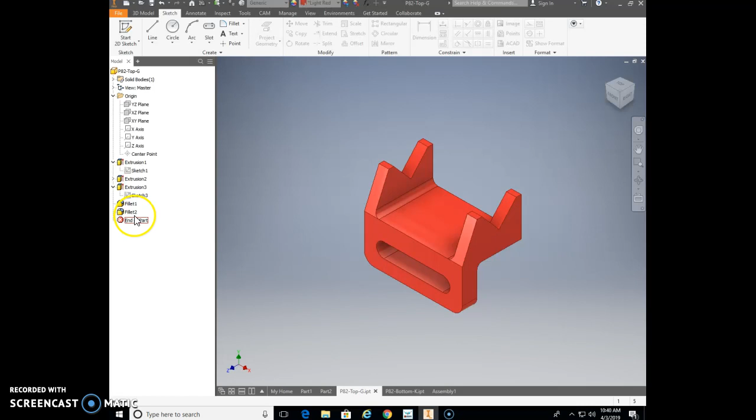First off, it's always a good habit of saving your fillets to the last. It's a lot better to add your fillets when it's a 3D solid than to add them into sketches. Fillets on a sketch will really increase the complexity of your sketches, so it's better to fillet them at the end. Fillets are something that often change, so it's easy to change them if you do them at the end. For example, those two bottom corner fillets, I did those at 1/2 of an inch on this drawing, which is great.

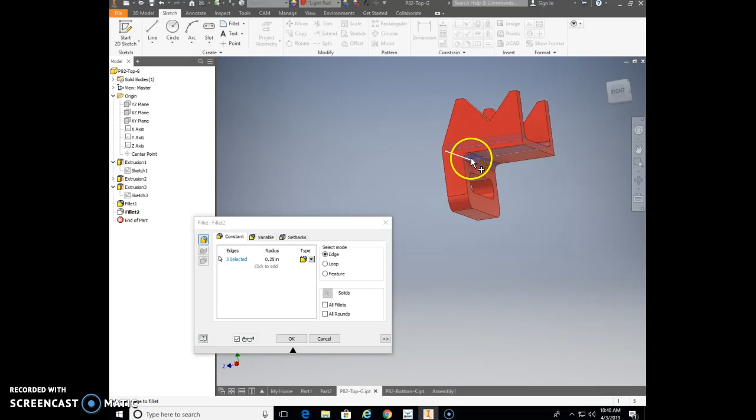These fillets, which are those two there, and one on this side, I did those at the end, and I did those at 1/4 inch. So those fillets, always good to put in at the end.

The other thing I wanted to show you on this drawing is this slot. To put this slot in, there's a cool command for slot. I'm going to go back in there to the sketch for that.

So there's my slot all fully constrained. If you notice, mine's already set up here. Up here, your rectangle command, if you hit the down arrow for it, you have some options for slots. You can do an arc slot, whatever. I just did the center to center slot, so I clicked on it, center to center slot.

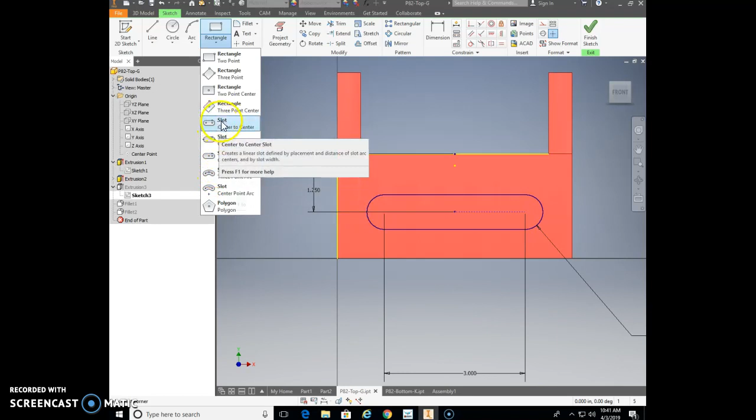Come over here, I'm just going to put one down on the open space. From there to there, put it on a nice straight line, and then you can pick your height of your slot. Then you just start dimensioning it up.

On this one, the first thing I did is I wanted it centered up here on my object, so I did a horizontal or vertical constraint on that. I picked vertical, made the vertical point even with the center of the object, so that centers it up nicely. Put in the dimension here, showing the length of the slot.

Showing that as I have 3, so I'll make that 3. Then the radius of the slot at 0.375, and then one more dimension showing where this goes up and down. So this one I put it in like that, and that turns it all blue.

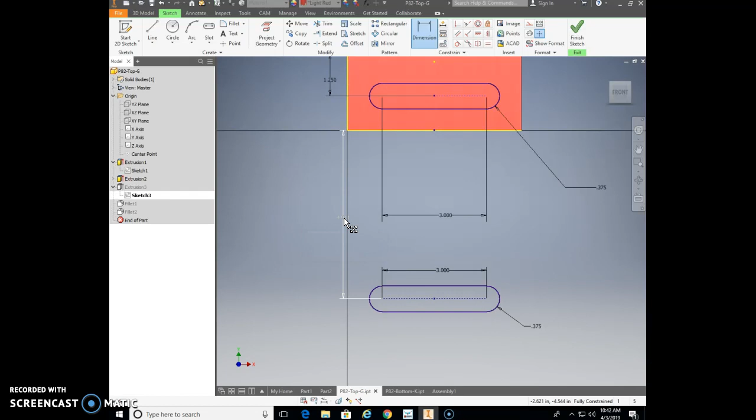So something like that. Obviously I don't need the slot down here in the wide open, but it was just kind of showing you how to do that slot. So any drawings you have slots on, slots are really not too bad to do if you know about that command.

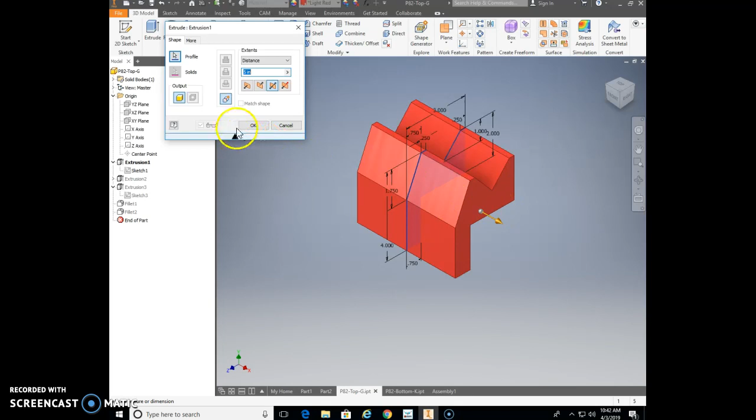Other than that, on this drawing, I started this as just one block that was this shape from the right side view, and drew it like so. Extruded it both ways. Then I made an extrusion and made this a cut on this extrusion and cut out that block off the front face there. And then I just did my slot as I just showed you and used the fillet. Really a pretty straightforward drawing.

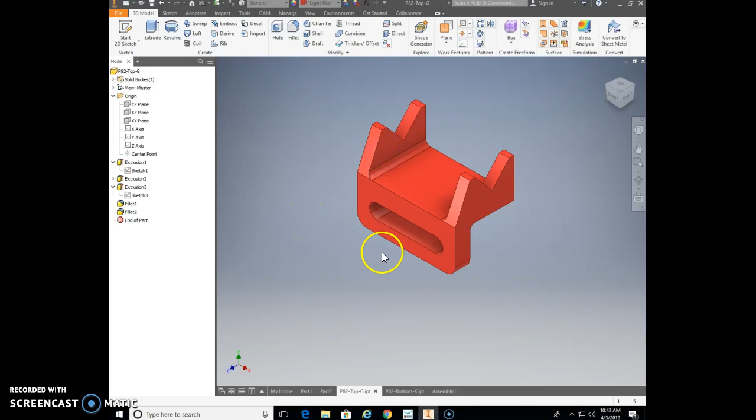Okay, so your instructions for today now is, out of the new list of drawings you're going to get today, in combination with the drawings left from yesterday, I want you to make 3 parts that will fit together. So this is my first part I drew last time. Today I drew another part. I drew this part, and I want to make it so these 2 parts fit together.

So here's my assembly. I'm going to make it so these 2 parts fit together. I want to make it so this part fits right here onto this part, like that. So it's like these 2 parts were made to go together. You're really going to have to think about your dimensions so they fit together correctly.

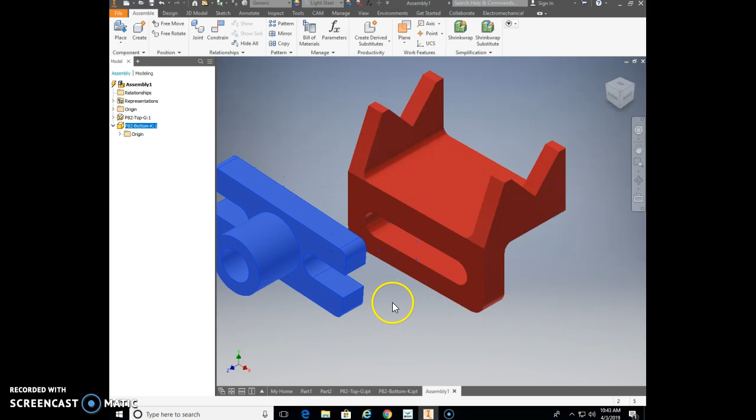So for example, I'm going to start this by constraining, just mating this part right there. Applying that, so there's that part mated there. It slides around on that surface. Then next, what I'm going to do is I'm going to mate this right up to my slot. So I may have to adjust some things, but we'll adjust if I need to.

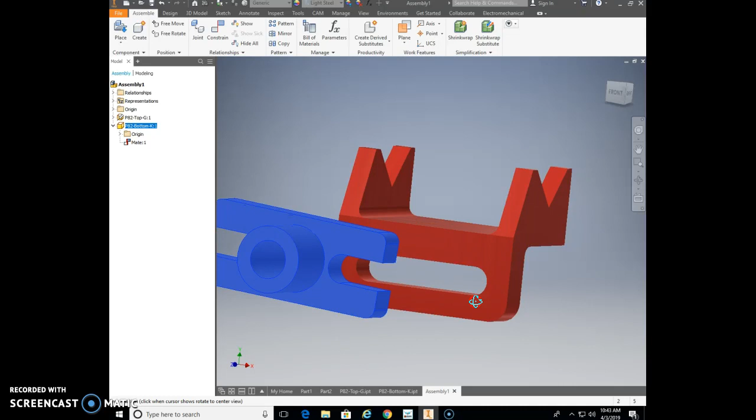So I'm going to go constrain, a little bit different type of constraint this time. I'm still going to use my mate constraint, but I'm going to hover over top of this arc, and it's going to give me the center line. So I'm going to click there, select the center line of that arc, the axis of it. Then I'm going to come over here, hover over top of that one, and constrain center line to center line. Right like that, I'm going to apply that.

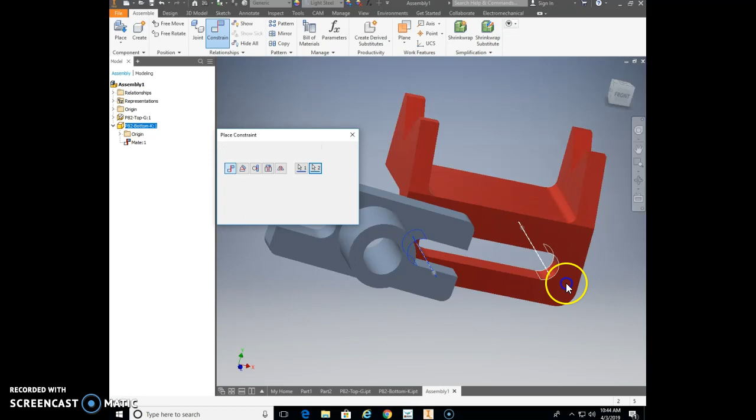So now let me hit my F6, get back in there. Now my part's fastened in there, it rotates right around those center points there, and that's exactly what I wanted. That's where a bolt would go through, just to bolt this together. But now, however, notice it doesn't fit real good here in my length on this. That length's just not right.

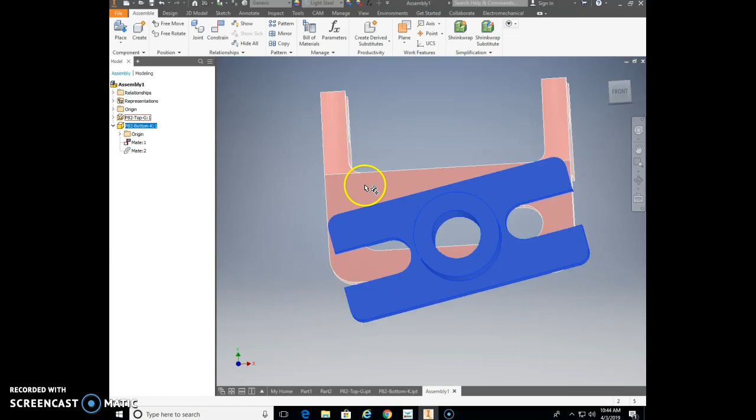So I need to modify one of these parts. I think I'm going to leave my red part all the same, that was letter G. I think I'm going to change this part instead, and this is letter K on the bottom. So instead I'm going to change this.

So I'm just going to measure. First off, you can use my measure command, and measure from the center of that circle to the center of that circle, and I get 3 inches. I need 3 inches between the center of those two circles on this part.

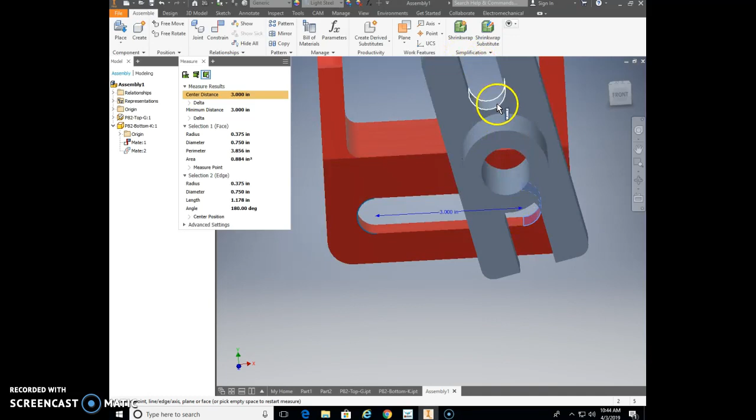So I'm going to go back to that part. I'm going to go in here. Let's figure out where this is. Where is this drawing? I think I did that one in my extrusion here. Yes, I did. So I'm going to click on my sketch.

Now, I made this a little bit differently, so that's going to be a little bit more difficult to do. The center of mine is actually going to be out here, so I'm going to really have to kind of play with this a little bit. 3 inches I know is not enough. You know what might be easier is doing it this way.

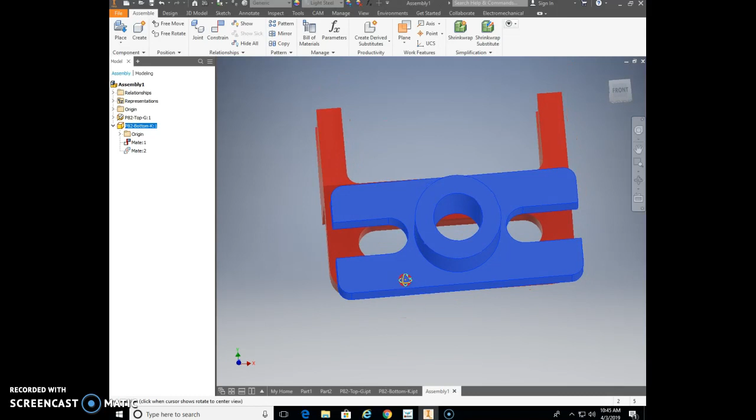I'm going to go back to my assembly. I'm going to rotate this back around to where it's approximately there in place. I'm going to measure from the center of this to the center of this. Alright, it gives me 0.791 inches. It's a little bit of an angle there, which is why it gives me kind of an odd measurement.

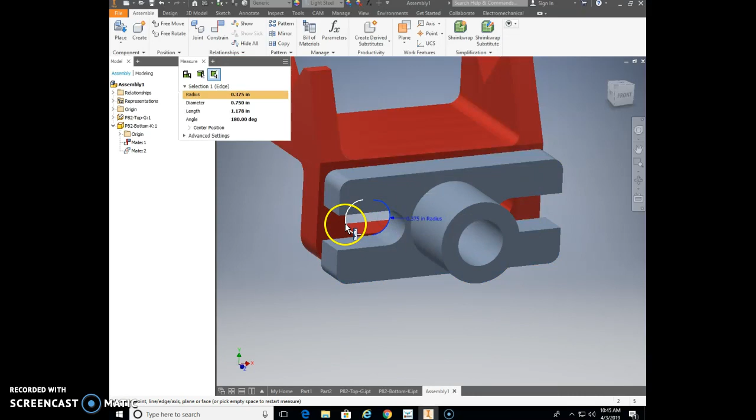And did I go from center to center? Ooh, I did not go from center to center correctly. Let me try that again. Let me measure once more. I'm going to measure from this bottom point to that one. There, it gave me a nice straight line. From center to center, it's 0.252, just over a quarter inch.

What that tells me is, on this, I need to increase this middle measurement a quarter inch. I'm going to go 2.25, do there.

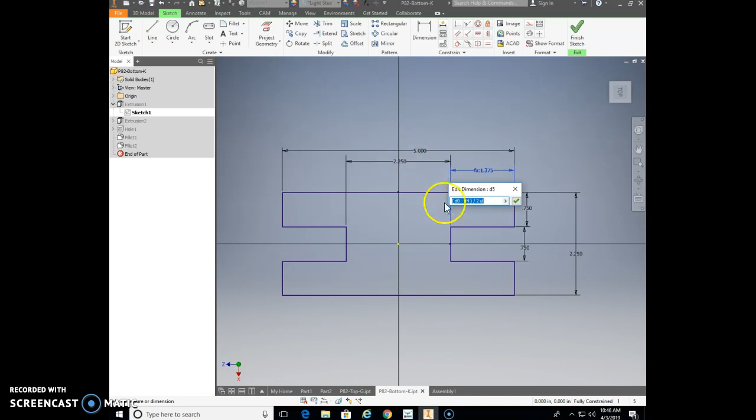Now notice here is another little side note. I made this dimension as a formula. So this dimension, we did this the other day, is the overall dimension of 5 minus the dimension of 2.25, so it's D0 minus D4 divided by 2. So that made it nice when I came in here to edit this drawing. I just edited this one, increased that to 2.25, and it automatically kept that centered up for me.

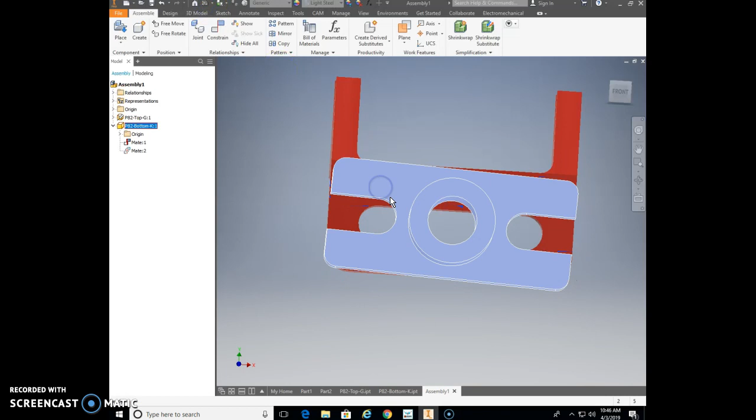Now let's see if this works in my assembly. So we finish that sketch, go back to my assembly, let's update. Look how nicely I think those things line up there. Let's see if it constrains. Constrain the center line of that to the center line of that. Apply, and look how nicely those two parts fit together. They fit together really nice. This one overlaps just a hair on this side.

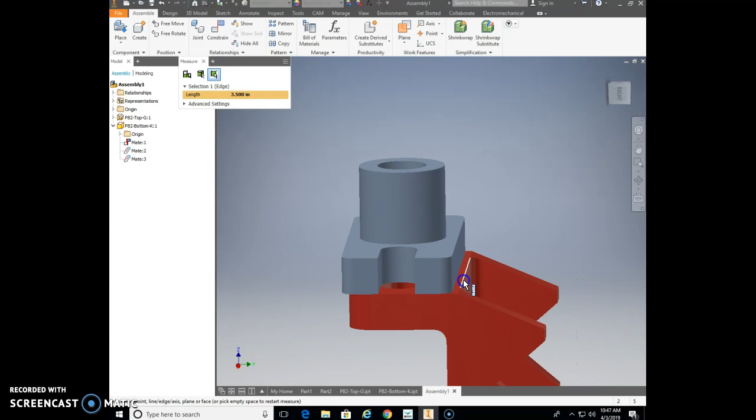You know, maybe we could do that a little bit, change that up. Where I would change that up is I'd probably change this red part, and I'd measure from, again, there to there. That measures the 1/8 of an inch, so 0.125. So on this drawing, I need to change this slot so it's 1/8 of an inch higher.

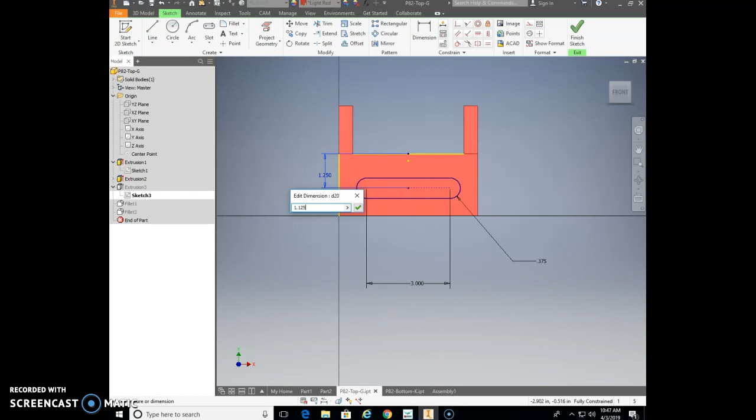So I'd go in there to that part, come down here to where I have my slot at, right there, and move my slot up 1/8 of an inch. Right now I'm at 1.25. Let's change that down to 1.125. Change that, finish my sketch, go back to my assembly, update it, and look how nicely, it's like these two parts were made to go together. And that's what I want you to do, is make it so those two parts are made to go together.

Now, you'll probably have to end up modifying your parts, the letters in the book from page 82, a little bit so they don't look exactly like the ones from the book. But yet, I think mine really look pretty close to the ones from the book here. I think my letter K looks very similar to the one in the book, and I think my letter G from the top looks very similar. And just look how nicely those things line up. So that's got two of my parts together.

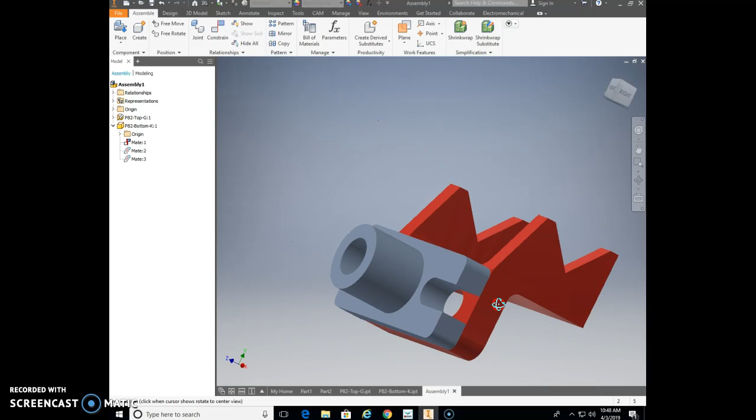I want you to add a third part to this. I do not have my third part created, but I want you to add a third part to this somewhere. I could do a lot of different things. So for example, I'm looking for another part that might work with this. I could just add letter E out here with the slot on letter E onto the end of this. Would be just fine. I could add letter H with a little arm on letter H.

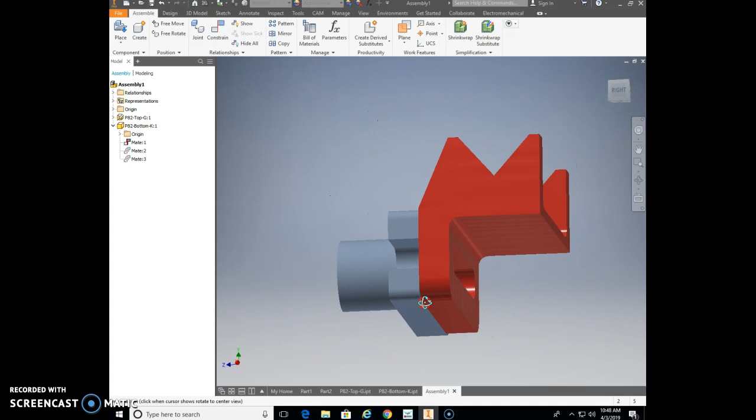I can make it line up with the slot here. I can make letter H, the circular part of it, line up with this portion here. Letter J, I can make letter J, the circular part of either end of it, line up to this part. I really am not going to be that picky. Just pick a couple parts to go together and make it work. So, good luck on this.

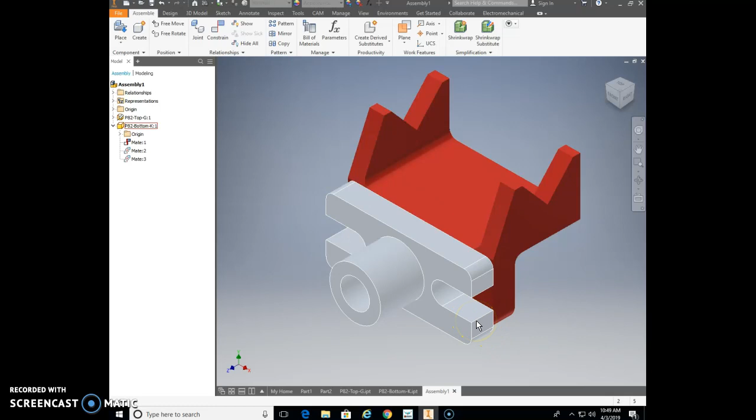Actually, I'm sorry, I almost forgot one part. The other part I want you to do is, I want you to make some pins. This part is just not going to magically stay on there. It's just not going to stay there like that. You need something that holds it together. Typically in this instance, you'd have a nut and a bolt that hold it together. I'm not going to make you create a nut and a bolt.

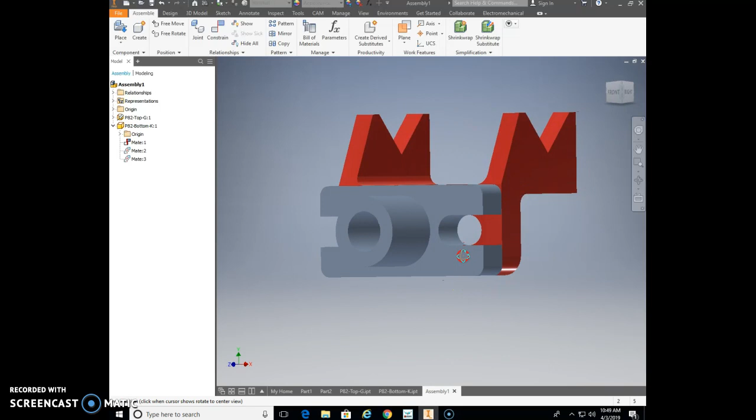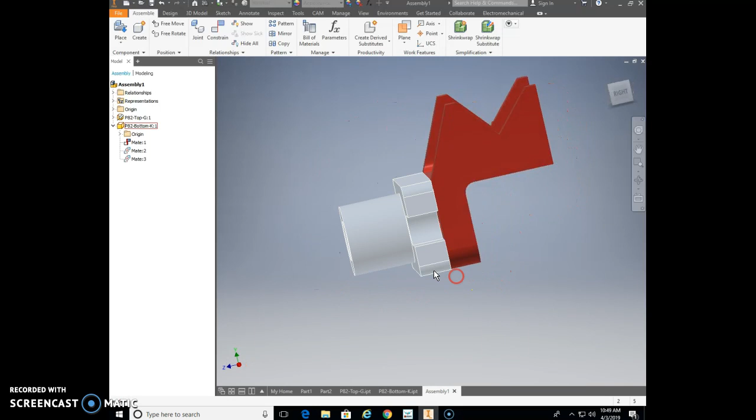Some of you are a little bit more advanced and are getting this. Great. If you want to create a nut and a bolt to go together, that's fine. But all I really want is just a pin that's going to hold these together. So for doing that, I'm going to have to do a little bit of measuring. I'm going to measure this size of my circle here. And what do I got? That's a 0.375 radius circle, so it's a diameter of 0.75. And then measure from this surface to there, it's 1.5 inches. So it looks like I need a diameter of 0.75 and 1.5 inches.

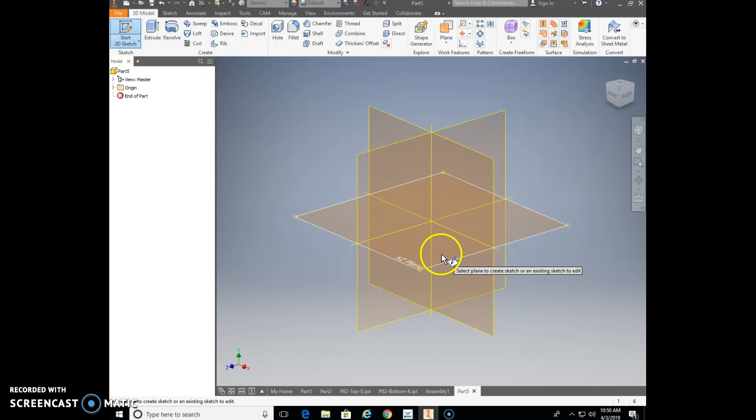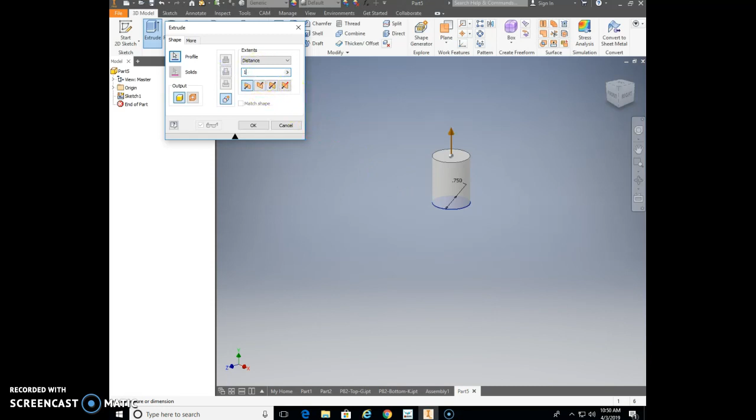I'm going to go ahead and do a new drawing, a new part. I just, again, make a pin. So I'm going to start my sketch. I'm going to start it on this top plane. I'm going to start with a circle, right there on the origin. Then I'm just going to dimension that at 0.75. So there's my circle. I'm going to finish that sketch and extrude. Again, on something like this, it's a bolt, so I probably would just go one direction. And I think I just measured that to be 1.5, so I'm going to go OK. Then I want to put some sort of a head on it.

So I'm going to start my sketch on this top surface. You could do a circular shaped head, but if we come up here and look, we have some other options. Where are my other options? I think it's underneath this, isn't it? Yeah, it is. Underneath there, we can do a polygon shaped option. If you know what a bolt is, a bolt actually has a 6-sided head, which it defaults to.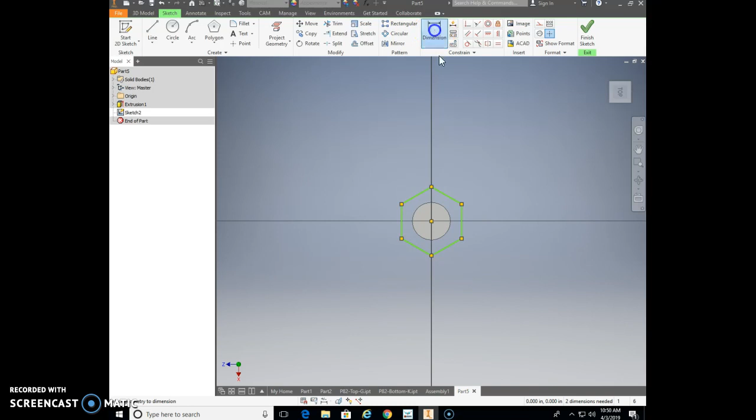And start it there, yeah, something like that. You need a dimension from flat to flat. Nice round number there is good, so let's go 1. Now the only other thing you need to constrain on this is this thing will spin around, so we need to constrain it something like this. Oops, actually, I guess I already have it constrained. Sometimes you do have to do this, and you have to make that point of it horizontally constrained with the center point, or vertically constrained with the center point, and that will do it. So there we got that fully constrained.

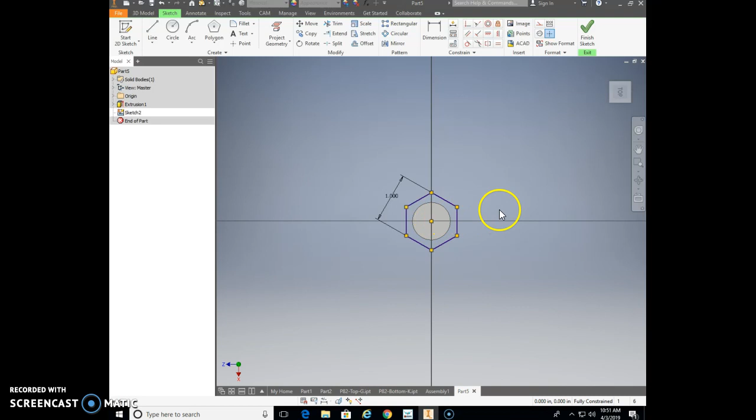I'm going to go ahead and extrude, and I'm just going to put a head on this bolt, maybe 0.5, like that. I'm not going to make threads to it again. I'm just going to make this a pin that sticks through there and stays in there. So there's that. I'm going to go ahead and save that with my other parts, and this is just going to be called bolt. I'm going to see if I can save it this way. Bolt and 0.75. I don't know if it's going to let me do the point there. Let's see. Hey, it did. So now I'm going to go back to my assembly.

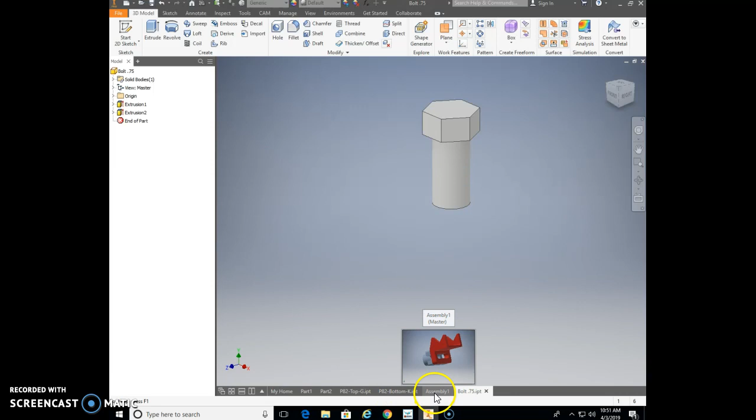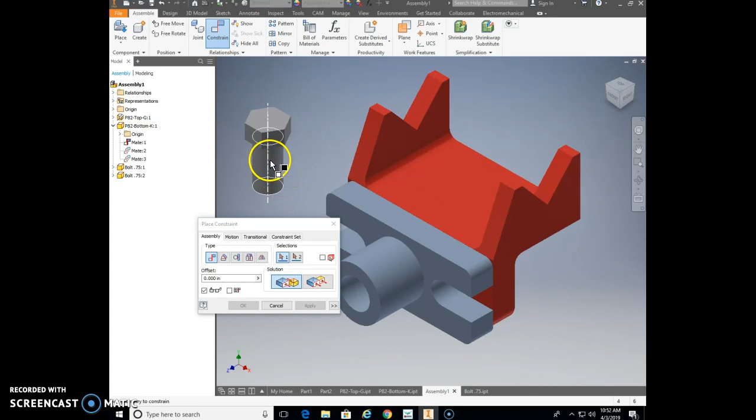I'm going to hit my place. I've got to go to where I have that saved to. I'm going to place in my bolt. I'm going to need 2 of them. Actually, I keep calling it the bolt. This is just a pin. I'm going to constrain. On this, I'm just going to use the center lines again. I'm going to use the mate option. I'm going to go center line of that bolt there, to the center line of that hole there. Apply that. I'm going to do the other one, center line there, to the center line there. Apply that.

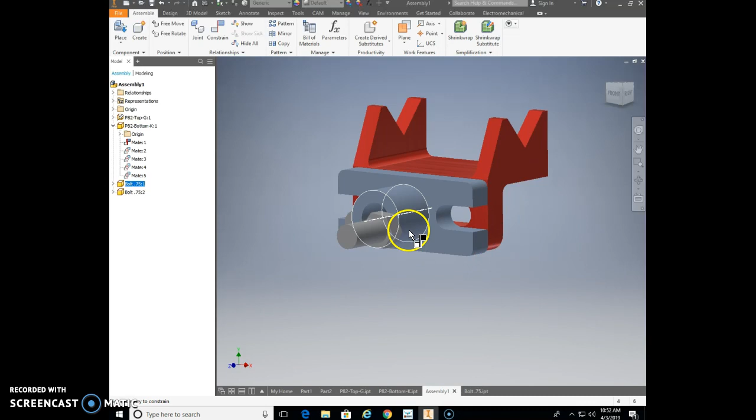Now notice, both of them are going in that direction. That's really not what I wanted. I want them going in from this other direction. So all I'm going to do here is go constrain. I'm going to do a mate. I'm going to mate that side to this surface. And apply that. Oh, it will not let me do that. I should have done the other step first. So that's okay. I'm just going to delete out that mate. Notice what I did there. I just opened this up, deleted out my mate. It's going to make me do that first.

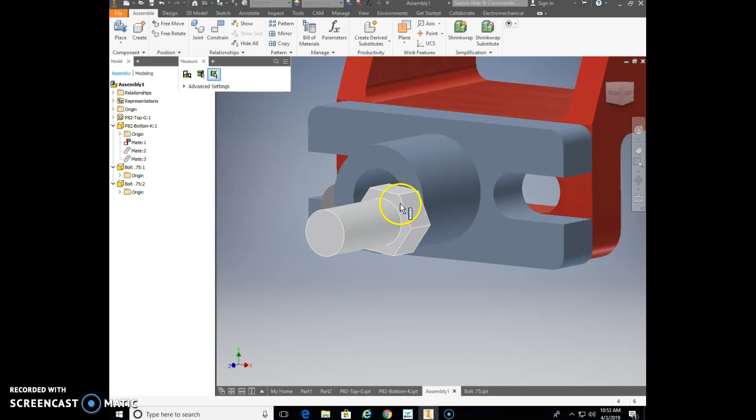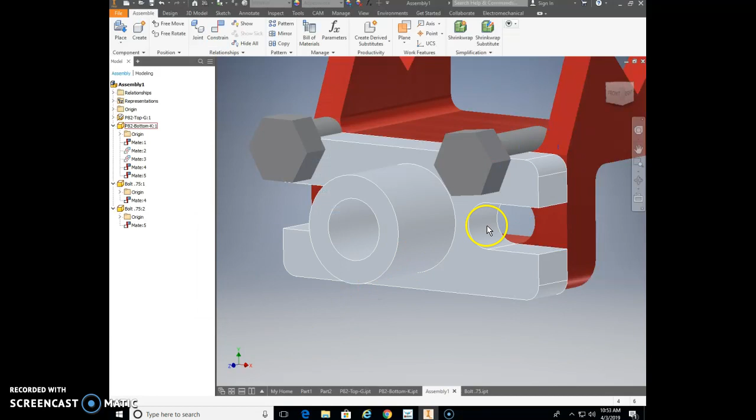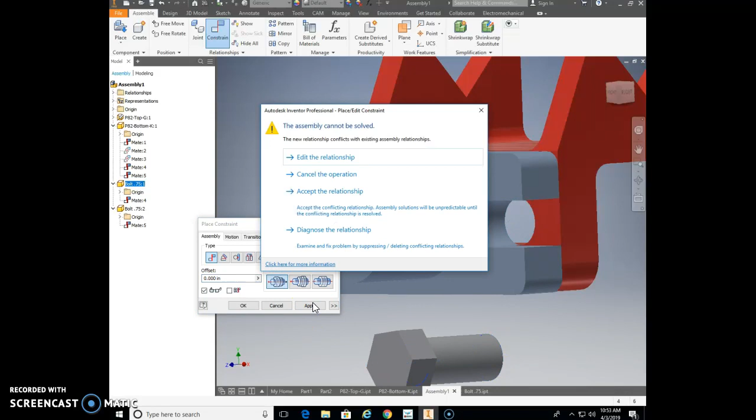So I'm going to constrain this surface to there. Apply that. Let me pull this one out of there a little bit. Constrain that surface to there. Apply that. Now I can go center line there, to the center line there. Apply that. Oh, come on. Center line that, center line that. Why is my center line that? Center line, center line. Huh. I don't know what it's doing to me. That's interesting.

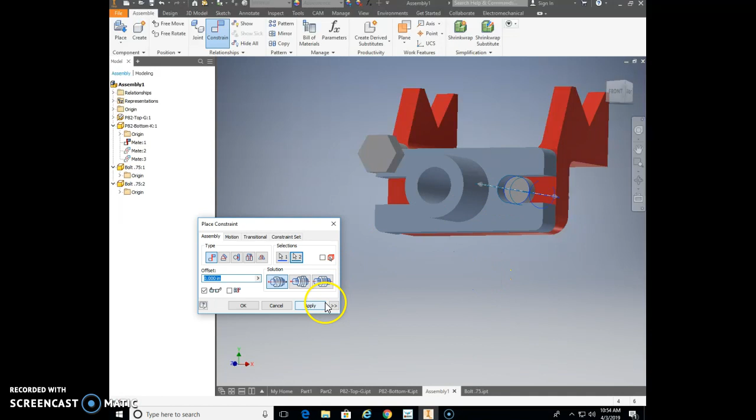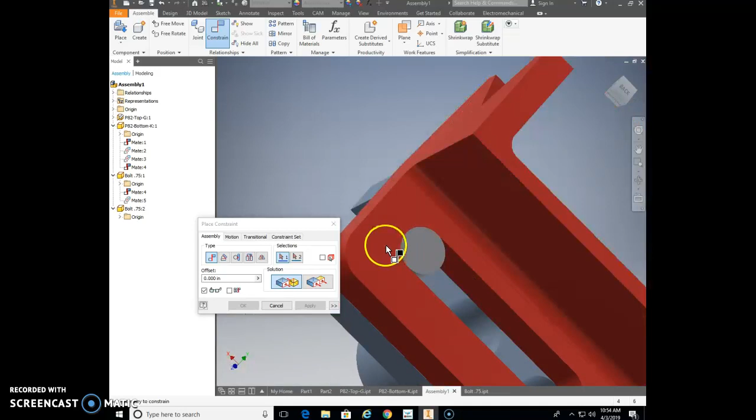I'm going to delete them all and try once again. Alright, one more time, sorry. That was very, very weird. There we go. I don't know what it was doing that first time. So center line, mated it there. Let's see if this other one will do it, if this other one's freaking out a little bit too. There we go. Oh, but I don't have the other mate done yet.

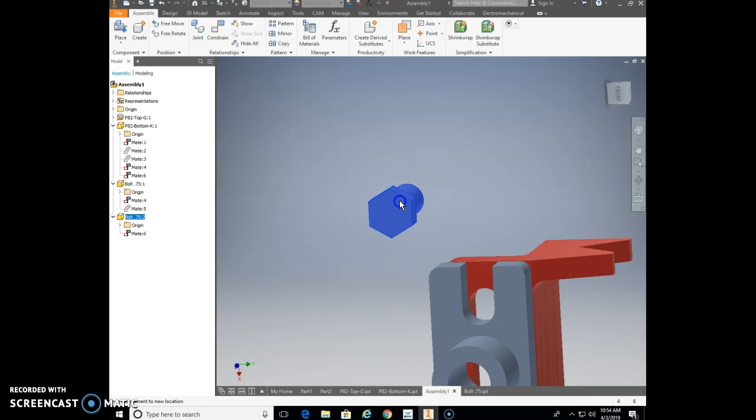Alright. Now again, center line of that. Do the center line of that. And it's going to freak out there. That's interesting. Okay, got it on that one. Alright, so there we go. We got 2 bolts. They're holding this in. These bolts will spin around and around. That's fine.